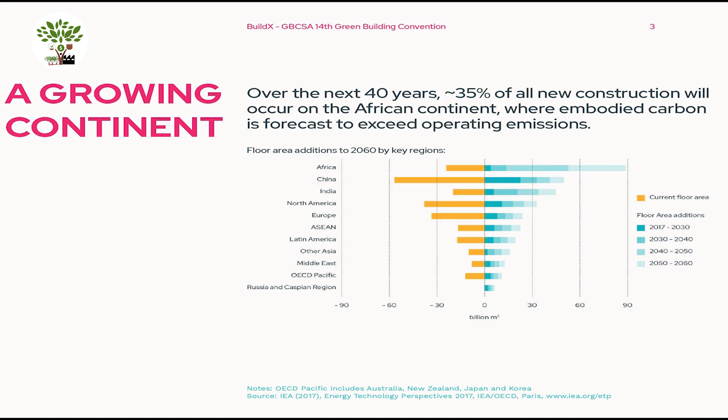But if we look at the next 40 years on the right-hand side of the center line, we can see where the future construction is going to take place. And about 35% of all of that new construction will take place here on the African continent, particularly in the years between 2040 and 2060. You think cities like Nairobi are growing quickly today? Wait until 20 years' time.

Now, this is a problem because buildings and construction account for almost 40% of global carbon emissions. And this is made up in 2 parts. It's made up of operating emissions, how we heat, cool, power our buildings. But it's also made up of embodied carbon, the carbon that's associated with the materials and the construction methods that we use to build. And of these, concrete and steel are the biggest culprits of all.

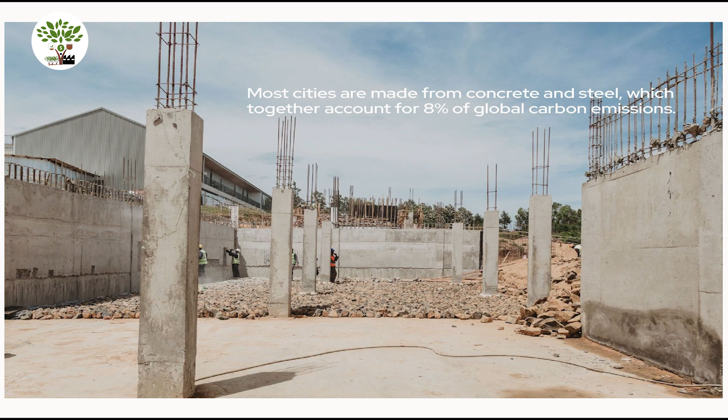They account for about 8% of global carbon emissions, which is about a quarter of the built environment's footprint overall. Concrete is actually the most consumed material in the world after water, which is quite a shocking way to think about it. And of course, most cities are made from these 2 materials. Look around you, it's mostly concrete and steel.

And so as we increasingly urbanize our population over the coming years at a rate that's already very fast, we're going to see an increasing use of these materials unless something changes. And so at BuildX, we follow what we call a 3R approach to building. And this starts first with reuse, which is to say, let's only build new where we have to. If we can reuse existing buildings, repurpose buildings, building is inherently a carbon-emitting act. And so if we can do something to not emit that carbon, let's do it.

But the reality is that such is our growth, we need to build a lot more new buildings, as I previously showed. And so when we do that, there's 2 other strategies we can apply. First, to reduce the amount of material we use. So let's forget for a minute how bad or good that material is. If we can simply use less of it, there's immediately less carbon.

And so building leaner structures, investing more time into design and innovative engineering to reduce those volumes, being less wasteful in the construction process. About 30% of the material from every construction site leaves that site as waste or lost material, which is a huge volume of our industry, which is accounted for carbon, but is not actually used in the final product. But ultimately, we believe we also need to replace the materials that we use today.

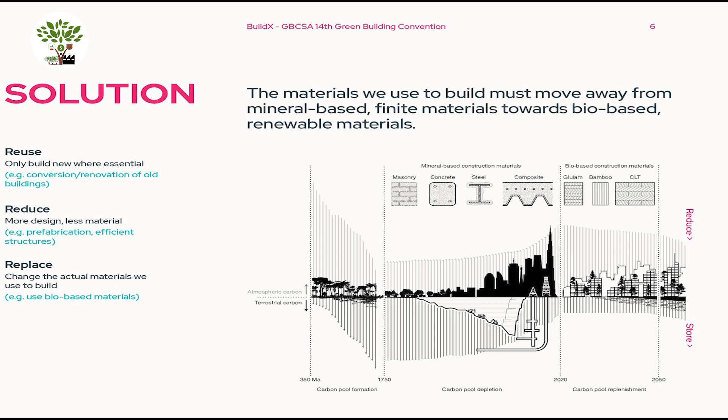And as we've relied on mineral-based and extractive construction materials like concrete and steel, that carbon has been released back out into the atmosphere. And so this is a trend that we know from the climate emergency and challenges related to that we need to reverse. And buildings have a major role to play in that, particularly through the use of bio-based materials like

bamboo and wood. And so today I mainly want to talk about wood, and I want to talk about wood in the context of buildings of the future. Where do we go now? So this is something that I'm sure many of you will be familiar with, but we talk a lot about this 3S model of sink, store, and substitute.

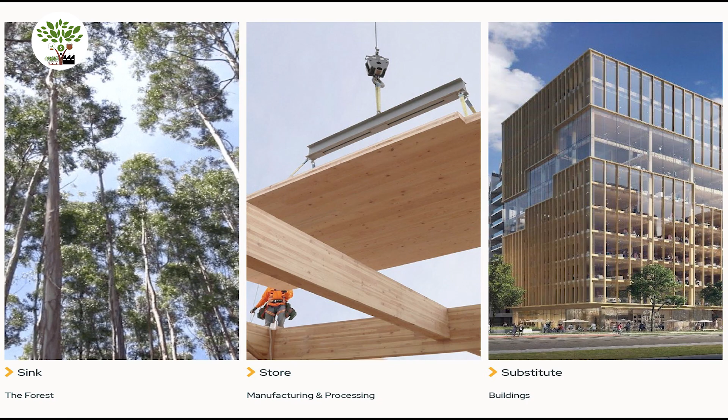When we plant trees, those trees sequester carbon. The carbon remains stored in those trees when we harvest them, and if we can use that timber in building products, which are really one of the longest lasting physical products or materials that we can produce with timber, decades if not centuries, we can lock away that carbon for a very long time. But we can also have the net effect of offsetting or not using the carbon that we would have emitted by using concrete or steel.

On average, a cubic meter of wood stores roughly 1 ton of CO2. Doesn't matter what form that timber product comes in. And if we made 90% of all of our new buildings from wood, we could cut global emissions by 4%. Now that's more than the carbon footprint of flying. But in the media, how much have you heard about flying versus buildings? Certainly the former, I would have thought. Which is not to say that flying is not something we should do less of, but certainly we need to focus on buildings as well.

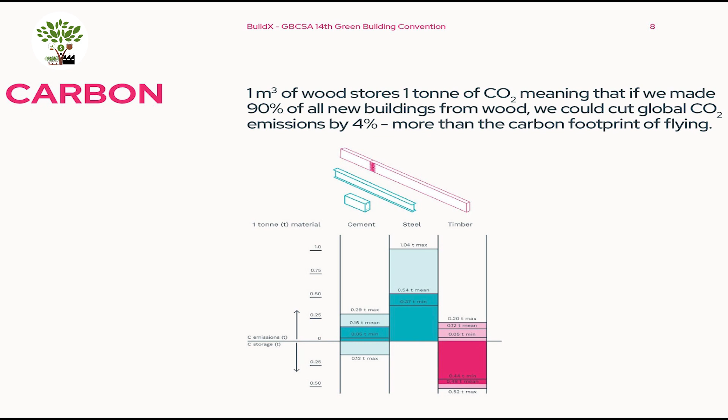And so the graph that's shown here shows concrete, steel, and timber, and it shows how much carbon on average per ton is emitted versus sequestered. And as you can see, the amount emitted for concrete and steel, particularly steel, is significant versus the amount sequestered, which in the case of steel is nothing. In the case of wood, there's a significant amount more sequestered in that process than there is emitted to produce a wood product for buildings. And so the net effect is a negative one in a climate positive sense. So we're sequestering more than we emit.

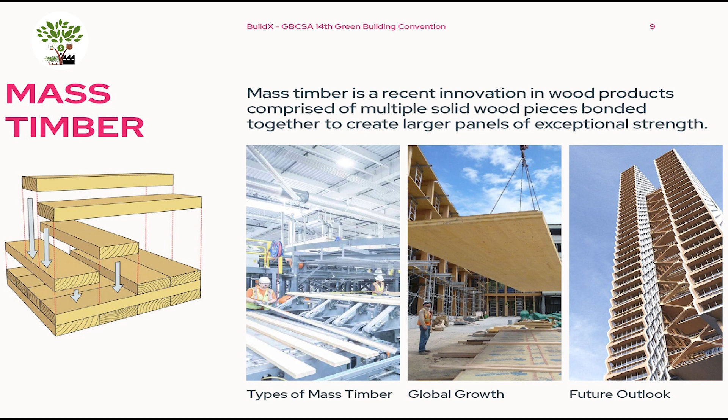But specifically, I want to talk about mass timber. And mass timber is a new or relatively new form of wood product. It was mentioned briefly in the last presentation as cross-laminated timber or glue-laminated beams. And this originated as a technology in Austria and Germany about 20, 30 years ago in the 1990s. And since then, particularly over the last few years, it's experienced a rapid rise in interest, in popularity, in new information and evidence to support the use of this building material.

And essentially what it is, it's taking young, fast-growing agroforestry species, particularly things like spruce, fir, pine, even eucalyptus now, and gluing it together either in parallel or cross-directionally in each layer to create large, massive pieces of wood that can be used for structural purposes in buildings. So much so that today in Chicago, they're planning an 80-story building constructed using this material. No concrete, no steel above ground floor, all wood. It's incredible.

Now, at this point, most people, at least in many of the places I've taught, look at me like I'm a bit odd, and they sort of think, 80 stories made out of wood? Surely fire is a major concern. Well, the interesting thing is that actually fire is one of the things that's really exciting about this particular product and material. Firstly, if you were to try to take a large piece of wood, any kind of wood, a big log or a big piece of CLT, and try and get it to go on fire with a match or a lighter or a blowtorch, you're going to be there for a very long time. In fact, you're probably unlikely to get that piece of wood on fire.

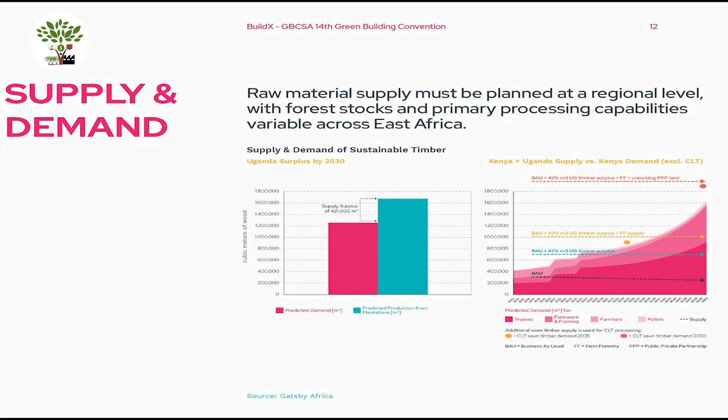There was recent research carried out by the London School of Economics, published earlier this year, which ranks countries or regions according to their potential for a mass timber building industry. And that measures the potential based on demand for new buildings, the health of the forestry environment and the amount of supply, as well as the infrastructure to move timber of this scale around.

Sweden, perhaps unsurprisingly, scores number one in the world on that research. But what might surprise you is that when you take East Africa as a region, particularly Kenya and Uganda together, it would be in the top 5 in the world. So the potential here, at that level of study at least, is very compelling. There are other challenges, of course, that I'll get into shortly.

But just quickly to finish up on the benefits, particularly from a building perspective, this product, cross-laminated timber or glue-laminated beams, is 80% lighter than concrete for construction. And so that means we can have much less material in the building and much lighter foundations that require less material. They can be up to 70% faster to construct. And that makes a huge difference both in terms of meeting the new building demand, but also for developers or other building owners in terms of their finance and their ability to meet their client needs more quickly.

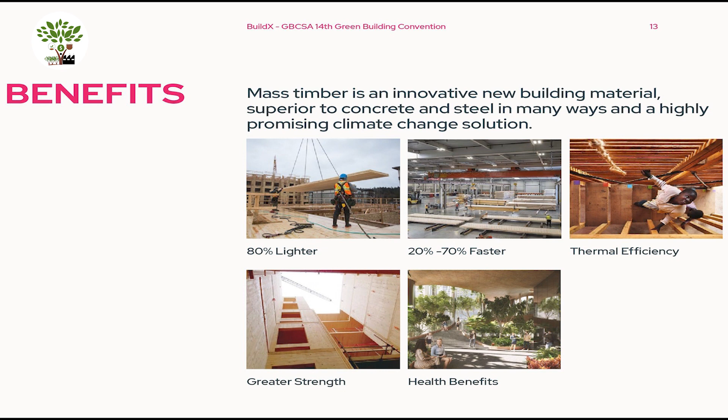The material is also more thermally efficient, creating a better internal environment for occupants. It's stronger pound for pound than concrete and steel, so we can actually make stronger buildings. And the one that really excites me is that it has proven health benefits. Timber buildings have been shown through research and evidence, particularly in Europe and the US, where there are more of these buildings to see, to reduce stress levels, to help purify indoor air quality, and overall to have a positive impact on occupant health.

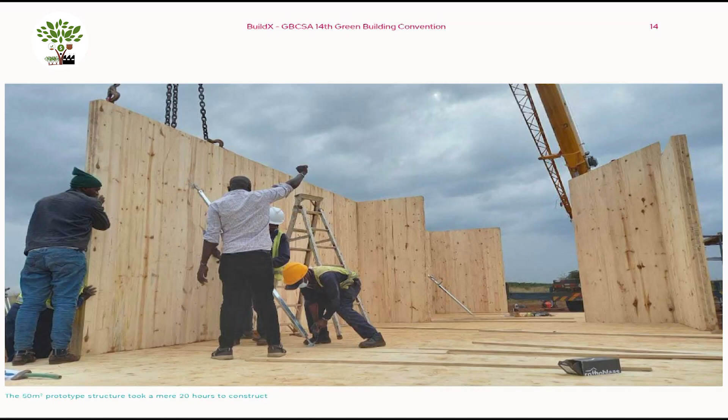I'm excited to say that BuildX, in partnership with a CLT panel processor in South Africa called XLAM, as well as various other partners, including Gatsby Africa, who are here today with us, have been able to build the first CLT prototype in East Africa. So this is at Tatu City. You can go and see it today. We have our launch event next week, so if anybody's interested, please reach out.

And it's essentially conceived as a simple prototype exhibition to begin to give people a sense of what this material feels like, what it looks like, what it's like to touch, and it has information inside in the form of an exhibition so that you can learn more about it. Personally, I love the look of the exposed timber, but what's also great is that if you don't need to see that timber.

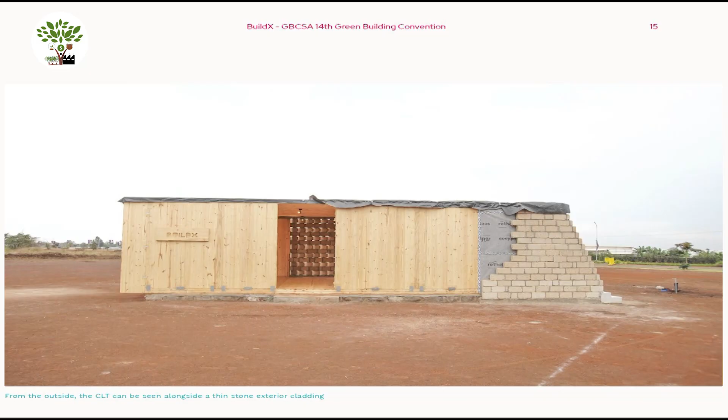You can create an apartment that looks exactly like any other concrete or steel apartment you might walk into. And actually, we've been deliberately sort of tricking people with this. When you approach this prototype and when you walk into this first space, unless you already knew, you have no idea that it's wood. And we've asked developers, construction professionals, financiers, all sorts of visitors to this prototype what they think it's made from when they come in. Nobody so far has guessed that it's wood. So it's a very exciting material from that perspective.

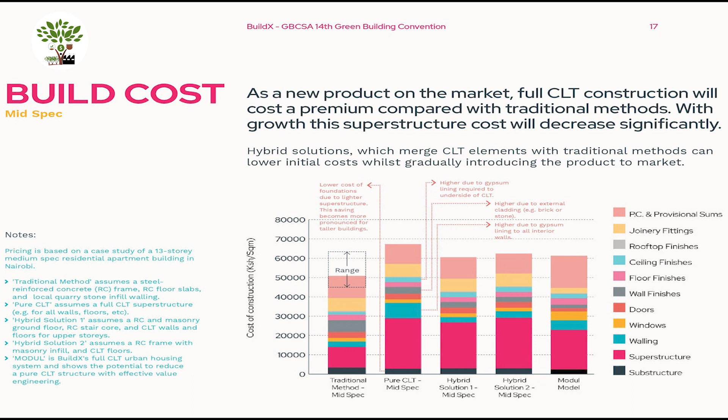Just to briefly touch on cost, we've modeled what we think would be the first year's price per cubic meter of CLT if it was produced in Kenya. And so on this basis, we reckon that we can be relatively competitive with the middle income market or middle spec market within Kenya, which is basically looking at a range of between about 45,000 and 65,000 Kenya shillings a square meter. Within that range, we can build buildings that are fairly close, perhaps slightly on the upper side, but there are opportunities to bring that price down.

Where we're struggling to begin with would be on the affordable end of the market, where we still have a little way to go to really unlock this material for low-income affordable housing. But we've seen it happen in other parts of the world and in other markets. And so with economies of scale, as well as greater innovation around how we build with this product, we can reduce that price to become competitive over the first sort of 5-10 years or so.

Just to finish, the other big barrier that we see is really one of social and cultural acceptance. There's a lot of bias about wood. There's a lot of myths associated with it, be it related to fire, be it related to strength, and so on. So it's not as yet a highly desirable product, at least not here in East Africa just yet.

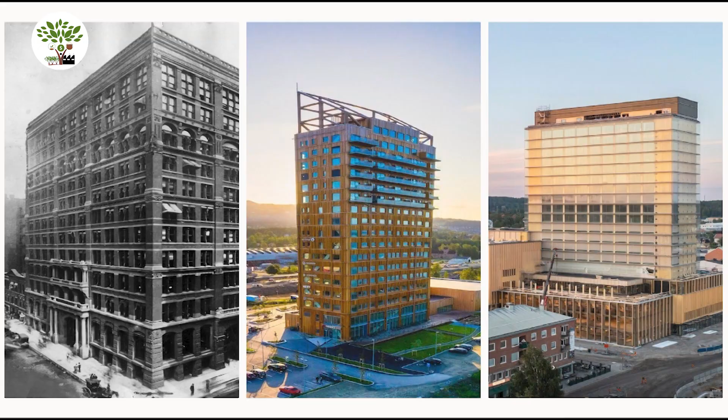But if you take the building on the left here, this is a building in Chicago. It's just over 10 stories. It was the first skyscraper, defined as being a building over 10 stories, to have ever been built in the world. It was built in the mid-1880s. At the time that this was built, people of Chicago and America were petrified to go inside this building. They thought it would fall on their heads.

And within a number of years, we were building structures much taller, including things like the Eiffel Tower, through to today, where we're building incredibly tall buildings, particularly in areas like Dubai and the Middle East and so on, using these materials. People are not scared to go inside anywhere in the world. And so the same can and will happen with products like mass timber.

Here we have buildings in Norway and Sweden in the middle and on the right that are already fairly tall, made out of mass timber, and I mentioned one even taller that's in planning. So it will change, it can change. I'm hoping that people in the forestry industry will be the first to buy timber houses made from this product, of course.

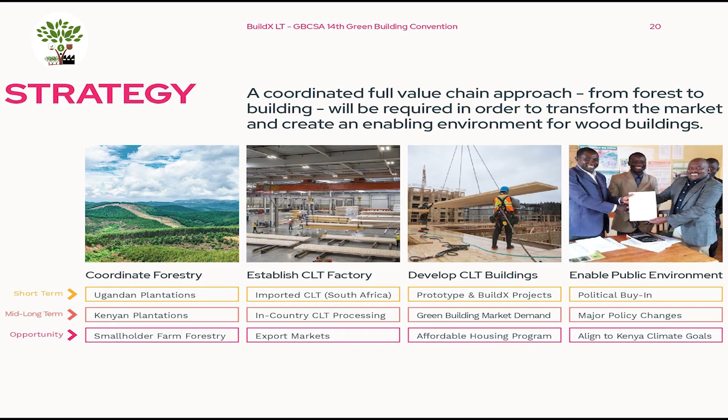But briefly, and to conclude really, on our strategy as BuildX, we're working across the value chain now. We recognize that whilst we are architects and construction professionals and building buildings is where we will ultimately be involved, we need to talk to the forestry industry. We need to talk to the wood processing industry. And we need to get all of those stakeholders and partners to talk with each other. And we also need to talk to other private sector players, developers, and so on, and the public environment, be that general public or the public sector in terms of government, to unlock an enabling environment for this product.